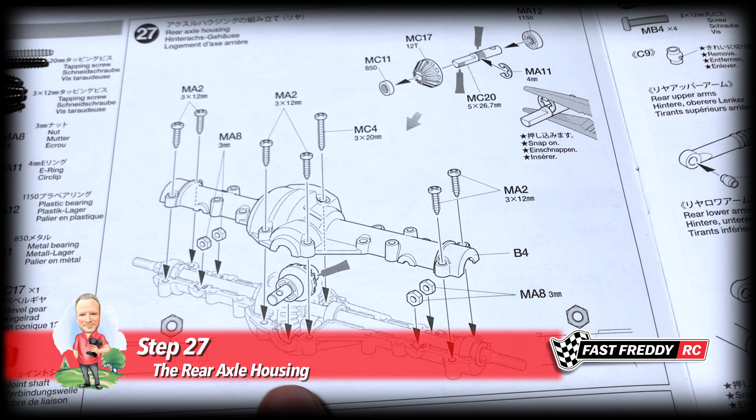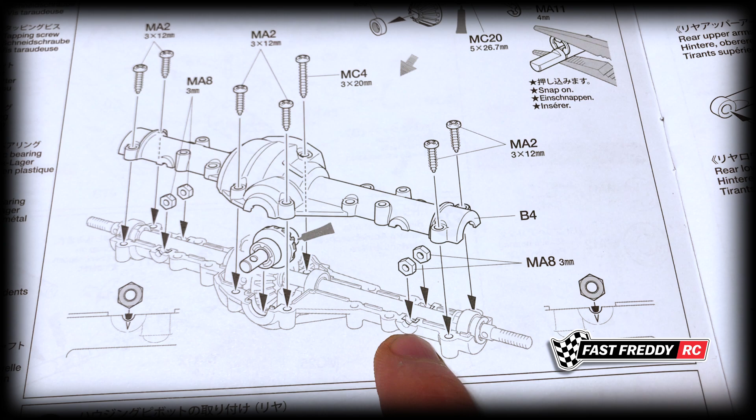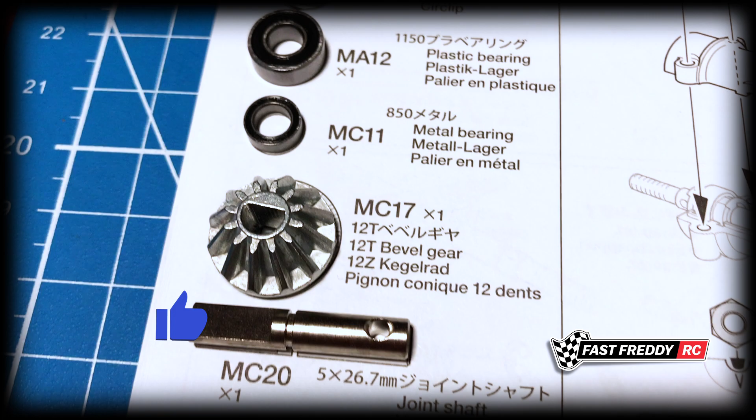So for step 27, the rear axle housing. Now it's time to do what we did with the front one: put in the joint shaft, put in the other bevel gear that's going to spin around on that large differential gear, then close everything up. The only thing, once again, is to make sure you get these nuts in there, because they're going to be used to install the ball connectors for the suspension arms in a later step. So don't miss those, and make sure they go in correctly so they're sitting properly. By the looks of it, you want the point down, similar to what we did in the other one. So here are the tapping screws, our nuts, the E-clip, and the bearings we need, and of course our bevel gear and our joint shaft.

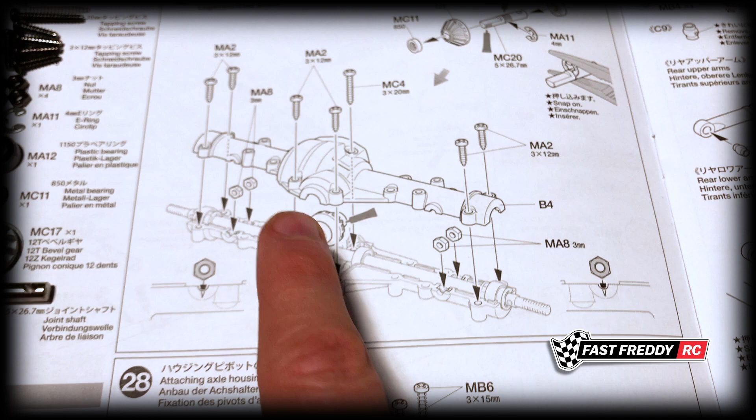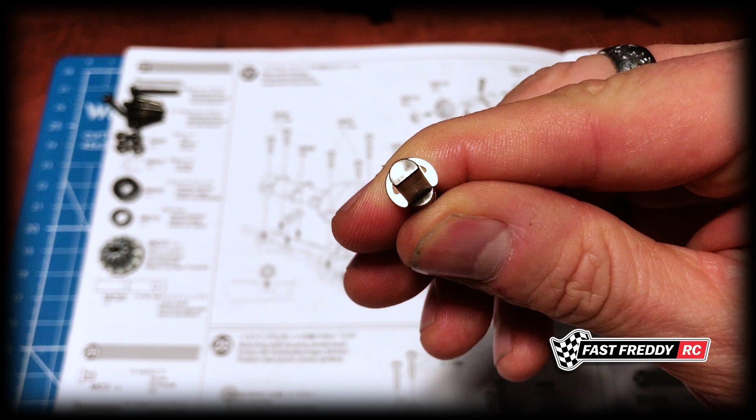So I'll set this up and we'll put this together. The first thing we're going to do is work on the joint shaft, and then we'll install everything and close it all up. So let's grab our joint shaft, and you can see that we need to put on an E-clip. Let's do that right off the bat. Grab our E-clip here, and we're going to put that onto there just like that. I'll grab our pliers and push that on. So now that is nicely in place.

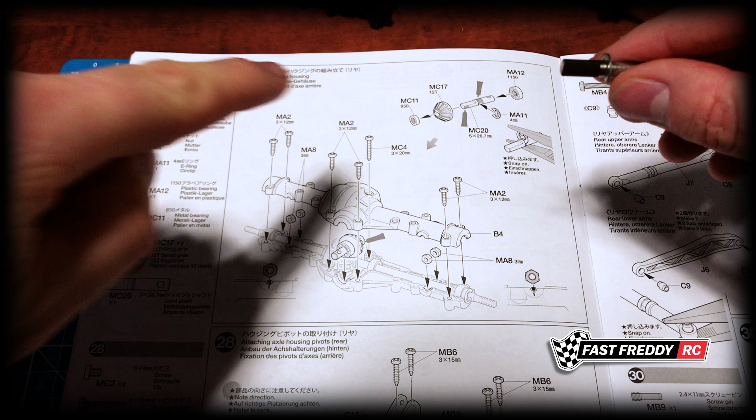That's solid. Now we've got to put on our bevel gear, and you can see they want a little bit of grease, which is fine, I'm going to do it. So we're going to slide this on. You can see how that sits all the way to the end, and then a little bit of grease. Again, don't really need to do this since I'm using the ball bearings, but I did it for the front, so we'll do it here. You can see that it only is half on - that's okay, that's the way it's supposed to be.

Then the same thing again on the other side, where the bearing is going to sit - right about there. I'll put a little bit of grease down there, not a lot, because we're going to slide that bearing onto there and let it spin. So you can see that ultimately that is how it's going to look and what you're going to end up with.

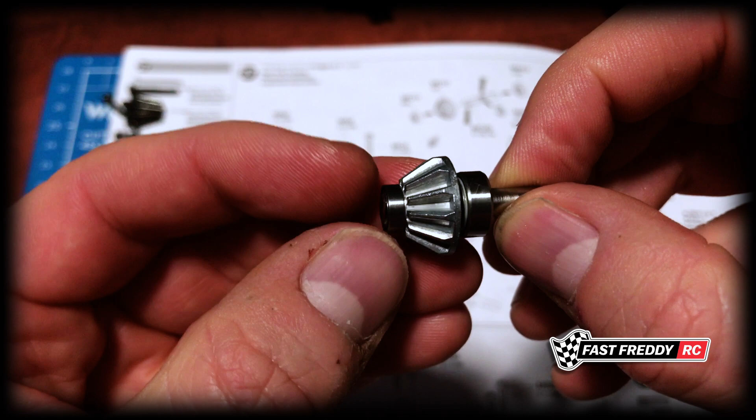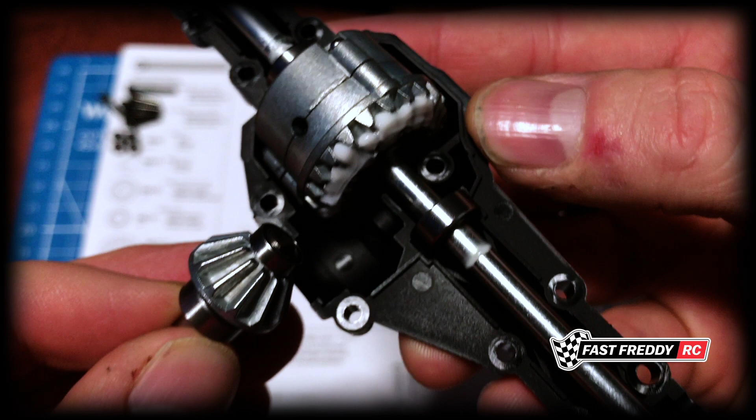Now we're going to grab our axle housing from before, and you can see that the little bearing is going to fit right there on the other side, and then the bigger bearing is going to sit there. So you can see how this is going to spin now. Because we greased the differential earlier, it's actually putting the grease onto that bevel gear as well, so I'm not going to put any more on there. That looks fine to me. So that part is done.

Now that we have this gear in place, the last thing we have to do is put in these nuts. As you can see, the corner should be facing down, which I'm going to try and do with this. I'm going to grab tweezers this time, try it this way, and make sure we get this in here just like that. So we've got that one in place.

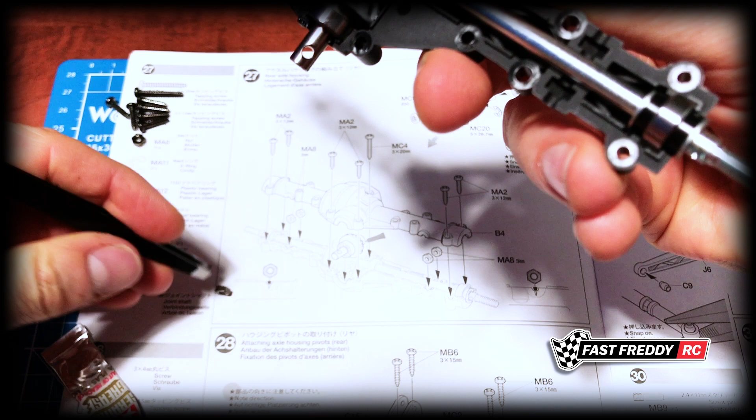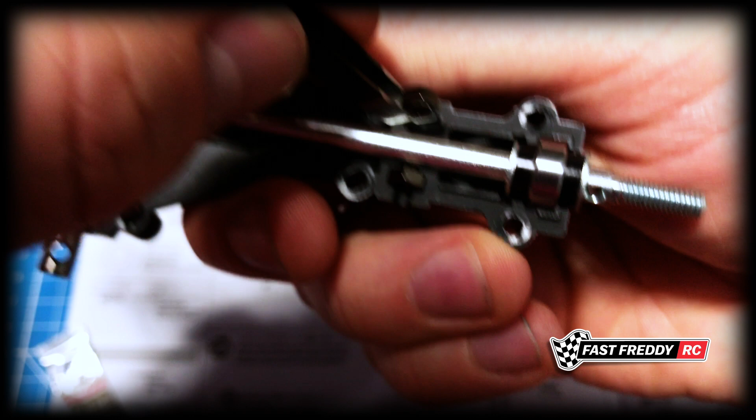And we've got that one in place, just like that. You can see how that's going to be. We're going to do the same thing on the other side. So we'll take this one, right, just like that. And same thing with the last one - we're going to sit that just like that. So you can see that the corners are facing up on both sides.

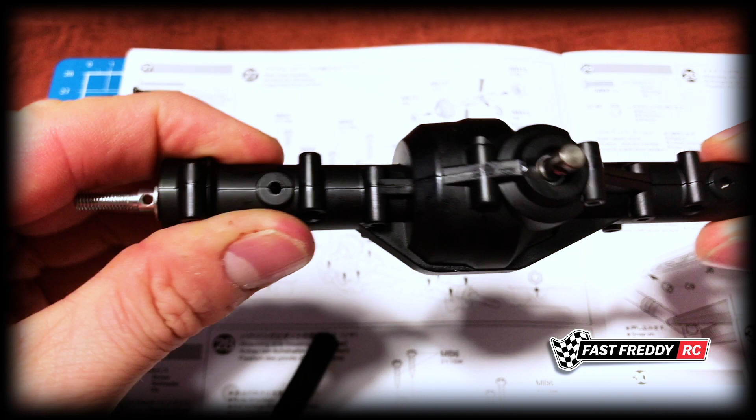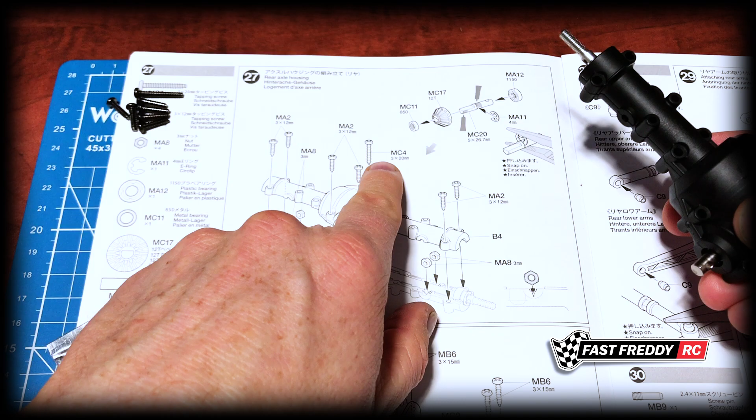So now we can grab the other half of the axle housing, and everything is sitting in there correctly. Now it's a matter of screwing it in. Let's grab the long one first, because if we grab the long one first, we know we don't have to worry about the size on the other ones - we'll get the one that's different out of the way first. With this one being the longest, which will end up fitting in this back hole, let's just screw this in and get it started.

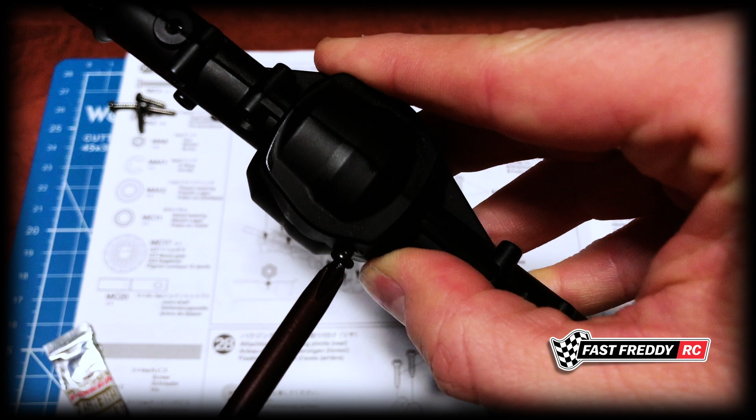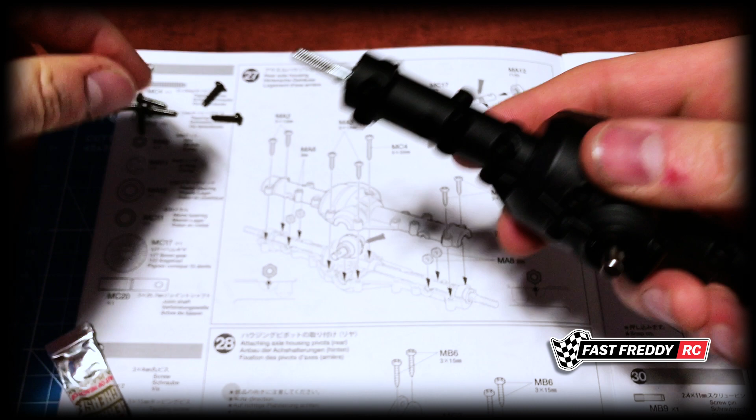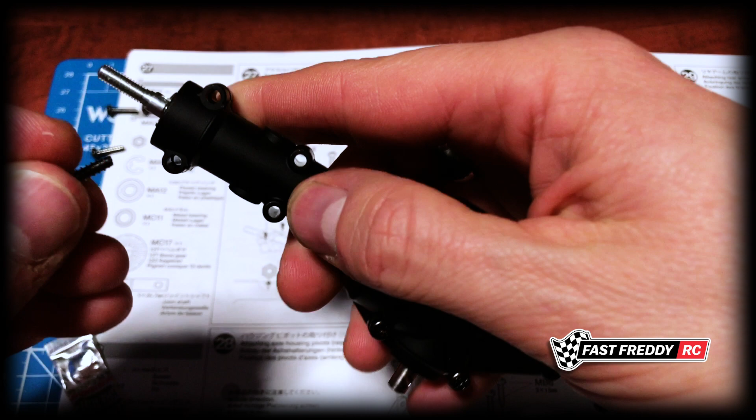Now, I'm not screwing this all the way because I want to make sure the other ones are all going in without binding first. We can see that we need 2 at the front, so let's put those 2 in and screw them in a bit. So there's 3, then we've got 2 more on this side, right at the ends. Another one on that end. And then on this side, same again - we've got 2 more screws that have to go into the ends.

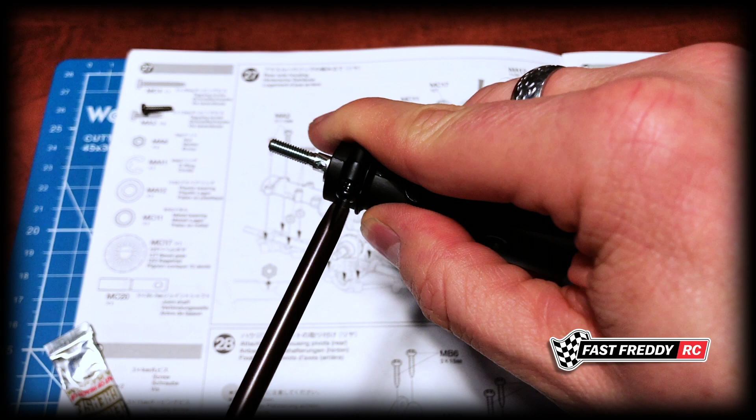So essentially there are all of our screws in place. Now I'm going to just tighten them up off camera to make the video a little quicker, but you get the idea - just make sure when you're going through that they're not binding, make sure they're all going in okay, and then tighten them down. So I'll come back in a second.

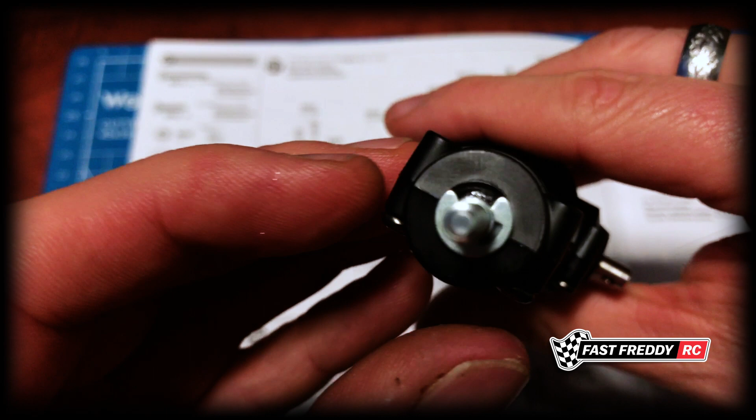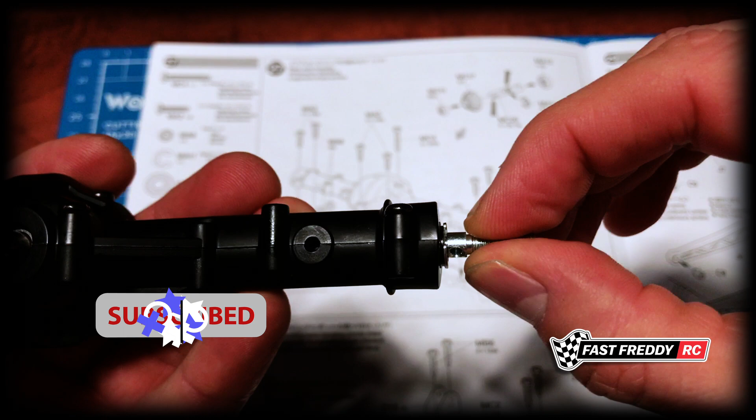So there is the finished axle housing. What's different with this side - if you remember with the front axle housing, I was saying it was weird that everything would come out of the axle housing very easily. Well, being that this one is the rear of the car, the rear axle is how I'm familiar with them, where everything is just nicely attached and solid - nothing can come out of the housing. But I guess with the other one having the steering hub as well, it needed more movement. So this is cool - there is our rear axle complete.

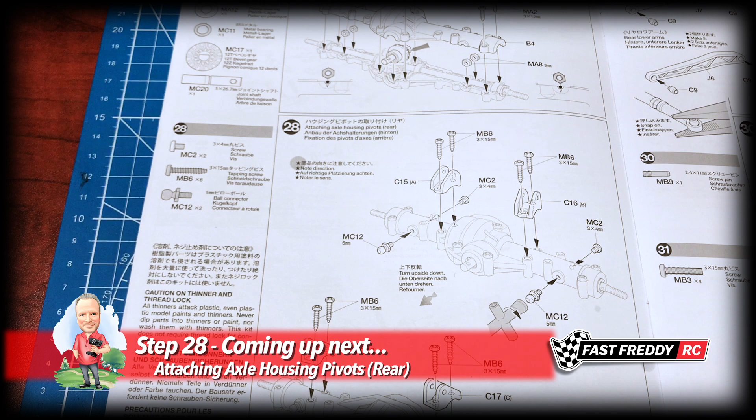So 27 is finished. Now we're going to move on to step 28 and attach the axle housing pivots for the rear.